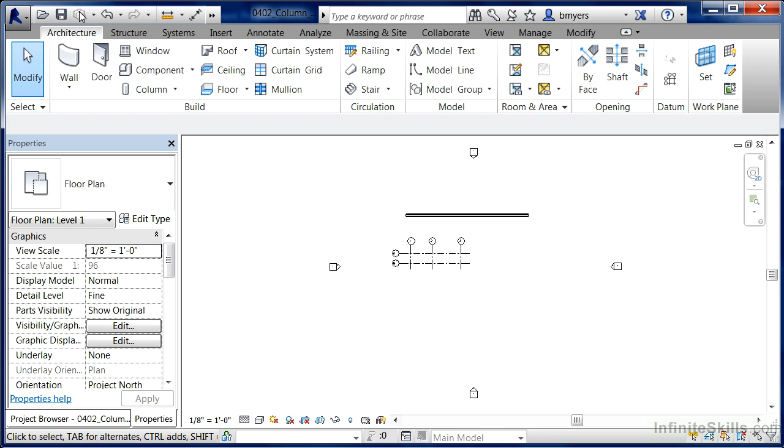We can start off by coming underneath the Architecture tab, finding the pull-down menu for column, then selecting Structural Column off of the list. The first difference between a structural column and an architectural column is the actual structural properties and dimensions of that column. We'll be able to find that underneath Edit Type once the command has been selected.

Here we can find the dimensions associated with the column, as well as area, weight. That's the kind of information that architectural columns do not contain. You can select OK to this.

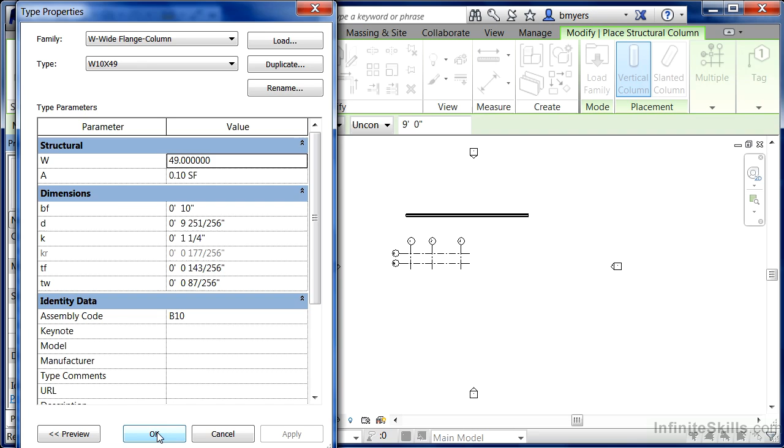Next, over here on the ribbon, we can see that there's two different kinds of columns that we can place. One is a vertical column and the other is a slanted column. All architectural columns by default are automatically vertical. If you want an architectural column to slant, you have to model it that way in the family editor.

Structural columns are not that way. Structural columns you can have be vertical or slanted simply by clicking on the icon up here at the top of the screen. Another difference between an architectural column and a structural column is here in the options bar, where we can see this is 1-click and 2-click.

Structural columns, when slanted is chosen, will allow us to click once for the base and second for the top of the column. By doing it this way, we'll be able to specify the point where that column will begin, as well as the second point in order to create the slant.

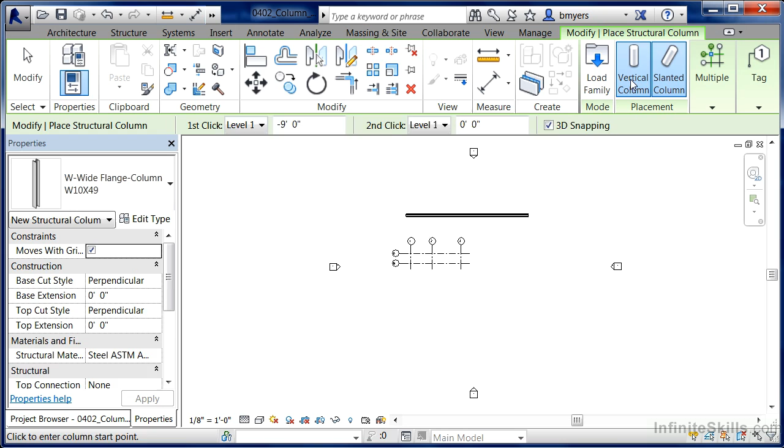Architectural columns natively inside of their properties already have that built in. If we select back on vertical, we'll see that the only option available to us now is going to be either depth or height. Make sure that height is chosen for this exercise so that the column will go up when it comes time to draw it.

Another special feature associated with just structural columns is At Grids and At Columns. At Columns will automatically center structural columns anywhere an architectural column is located at. At Grids will automatically center the structural columns any place a structural grid is located at.

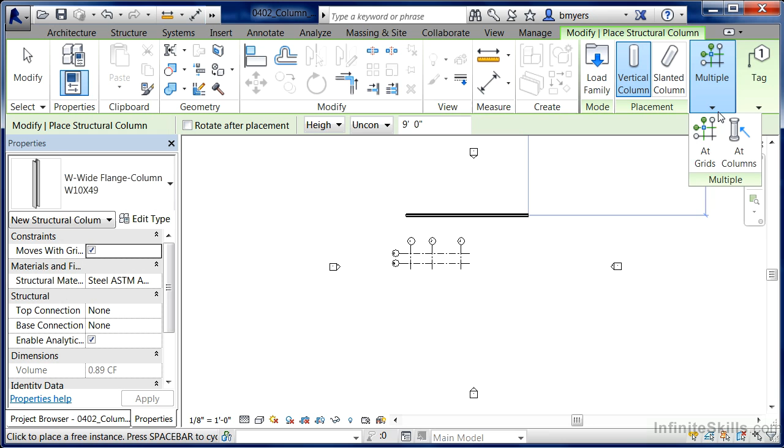Let's go ahead and take a look at grids. Select At Grids off of the ribbon, zoom in slightly to the small structural grid that we have drawn in place, left click once and hold the mouse button down, highlight over the structural grid. When we let go of the button, this particular column size and type will then get placed at each location where this structural grid is crossing each other.

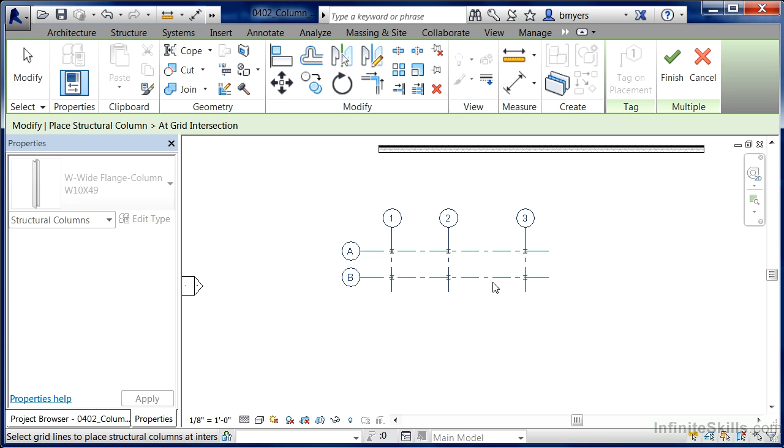So let go of your button. You'll immediately see each of those columns in place and click the big green check mark. That's a feature that architectural columns do not have. They cannot automatically attach themselves to structural grids because they're simply architectural and they're not structural in their nature.

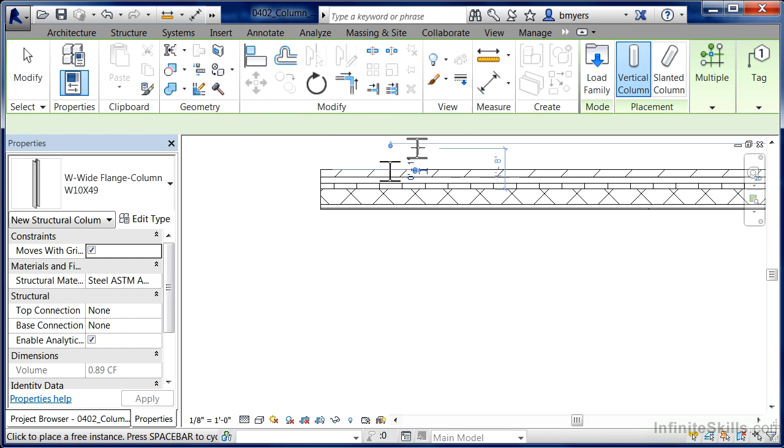If we would move a structural column up here and have it touch a wall, and then select any place along the wall, one of the things you'll notice about the structural column, if you hit escape a couple of times to get out of the command after placement, is that the structural column will just sit there. It doesn't change, it doesn't have any property differences associated with it.

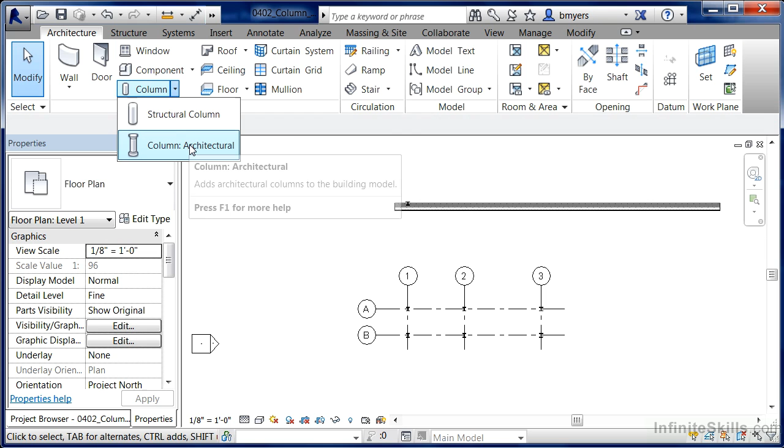On the other hand, this is one of the major differences with architectural columns. If we look underneath Architecture, click the pull-down list and select the architectural column, the fact this is rectangular doesn't really matter. This could be any style of architectural column, no matter how ornate, and it would still have these properties when it comes time to select against this wall.

Architectural columns, unlike their structural counterparts, if they touch a layer of material, they'll automatically take on the properties of that layer of material that they're touching along walls and surfaces. This allows us to do such things as pilasters very quickly and easily using architectural columns.

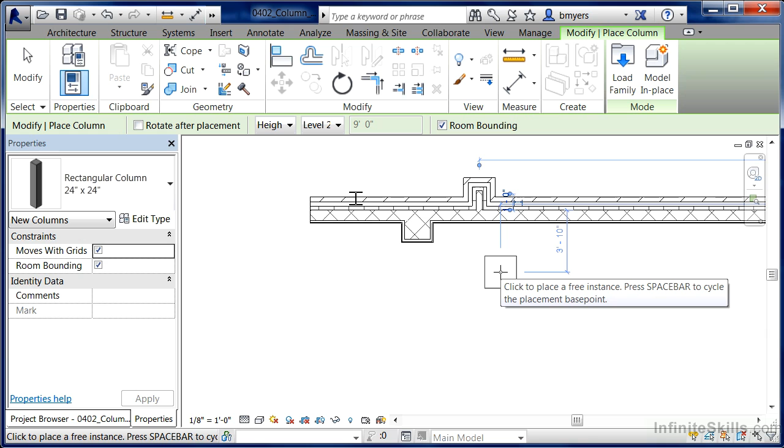You'll also notice that with architectural columns we don't have all the rest of those tools that we had available with our structural columns. That's one of the major differences or advantages to using structural columns, is that they have extra tools for quick and easy placement. But the advantage of the architectural column is that whenever you place them up against an object, they'll take on the properties and materials of that particular object type.

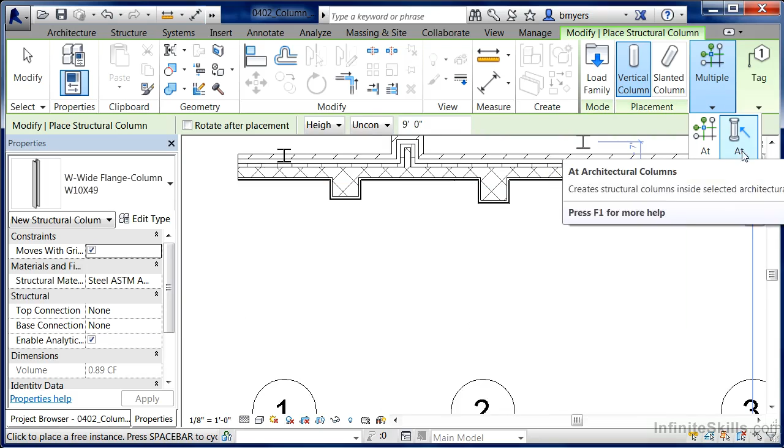So, architectural columns allow you to place them and they'll take on the properties of any object that they select, while structural columns will allow you to place them along column grids or even inside of existing architectural columns by selecting on the appropriate tool. In this case, I'll select At Columns, select on the inside of this particular architectural column, and click the big green check mark in order to place our structural column inside of it.